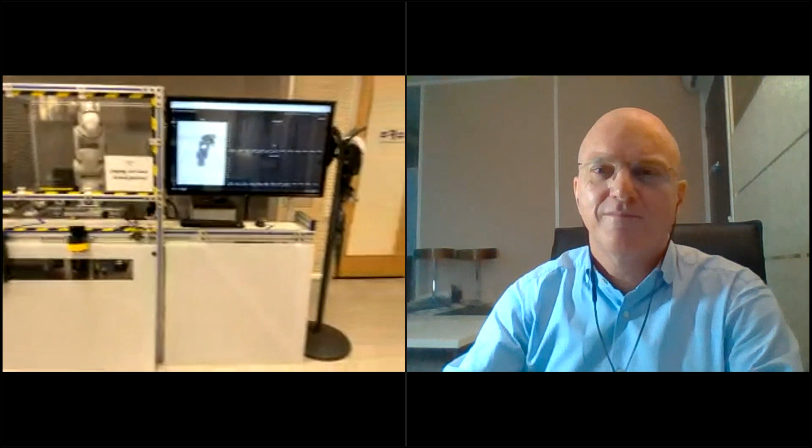I am right now in our R&D facility in Los Gatos, Silicon Valley. You can see we have that small mini production line on which we iterate to develop different types of integration.

For instance, right here we are working on a French-Swiss robot integration. You can see that we are using some cardboard because we tend to crash those while we develop this, so we don't create any damage. But once we have a good level of confidence, we move these industrial robots into a cage like that.

Next to it, we have a digital twin of the robot integrated into that small window over here, with some telemetry. I will show you that Vitesse can give life to all of these things. Station 2 and 3, that's where we interface with this industrial robot.

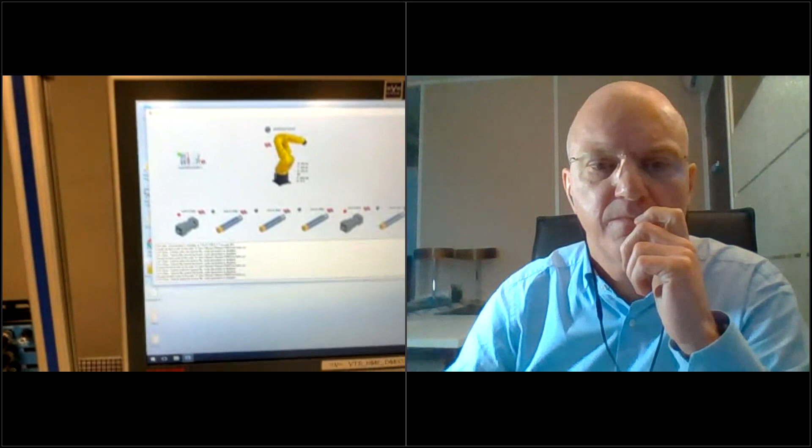We will work very quickly on building such a process as we have here. Here you can see we instantiated that robot. We are talking to an industrial controller over here, and we have a bunch of sensors and motors, as well as this robot, connected to that controller.

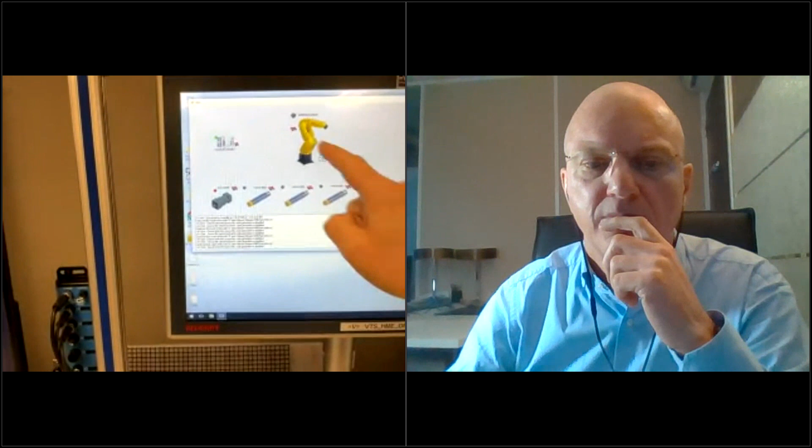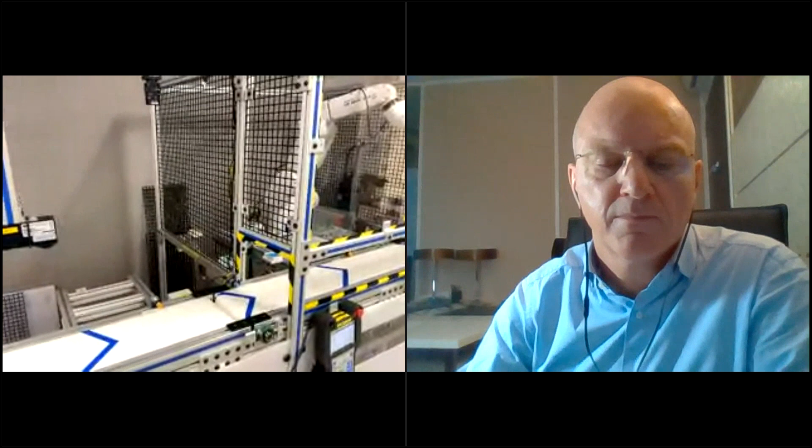With a little bit of orchestration between these components, we say when the pallet arrives over here, we want to start program number 3 on this robot, and we'll get the telemetry and handshakes to make it happen. How do we program that? I will show you very quickly.

I may be a bit clumsy because I'm holding a big iPad in one hand and manipulating Vitesse over here. In this example, I just did, five minutes ago, a quick and dirty instantiation of multiple devices that we will be manipulating.

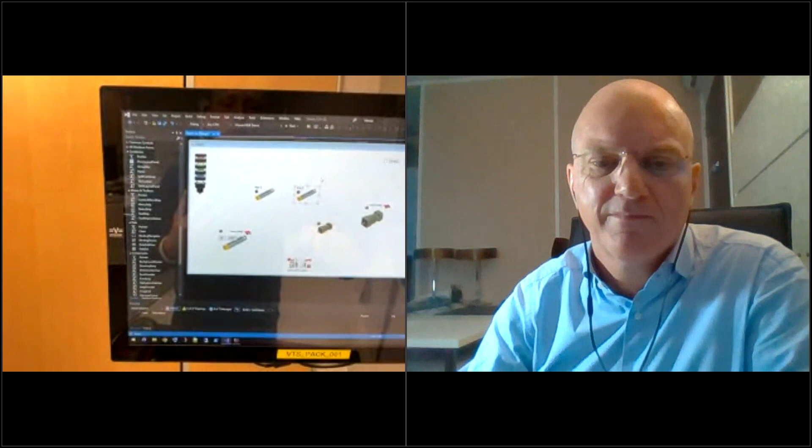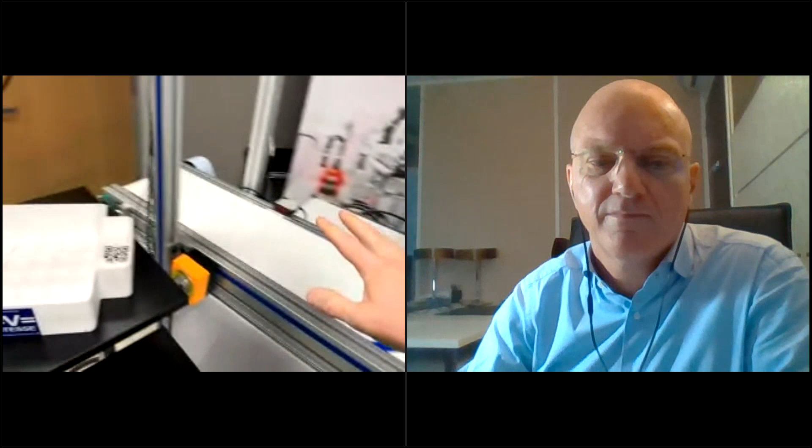We have a stack light over there. We have an e-stop. This conveyor is nothing more than a motor with a gearbox and some brakes. And we have a bunch of sensors that are on the line over here.

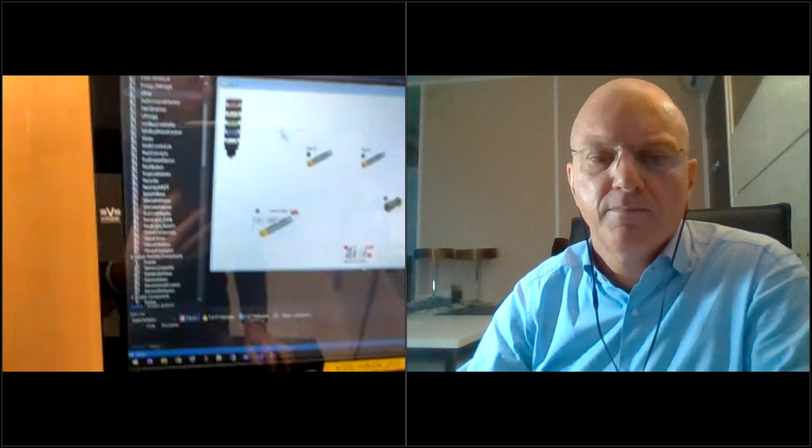The way it works is I only have to instantiate these components. For instance, we saw that we have an emergency stop over here. So what I will do is go into the Vitesse library, drag and drop an e-stop into the project. I'm going to drop it here.

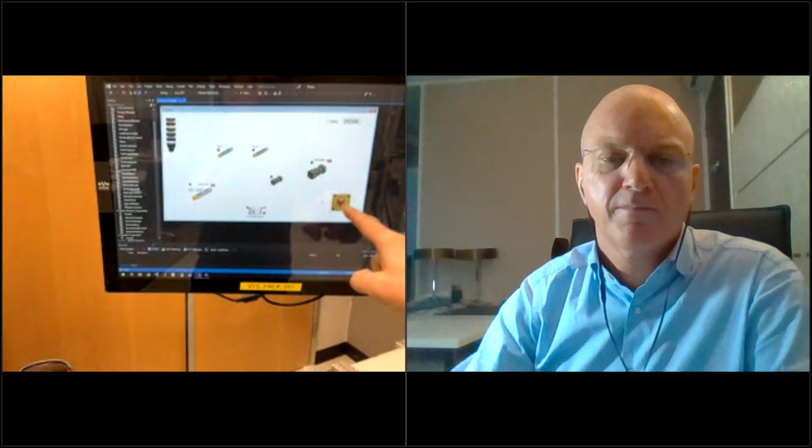There we go. Maybe you saw that it worked for a fraction of a second. That was Vitesse checking whatever is available in this project, what we have connected, and ultimately generating some code so that I don't have to. Now that I have instantiated that e-stop here, I know that safety is automatically handled at this station.

I have instantiated some motors, some sensors, and using— a little bit more to the right, yes. Sorry? A little bit more to the right, yes. Oh, okay, so can you see those?

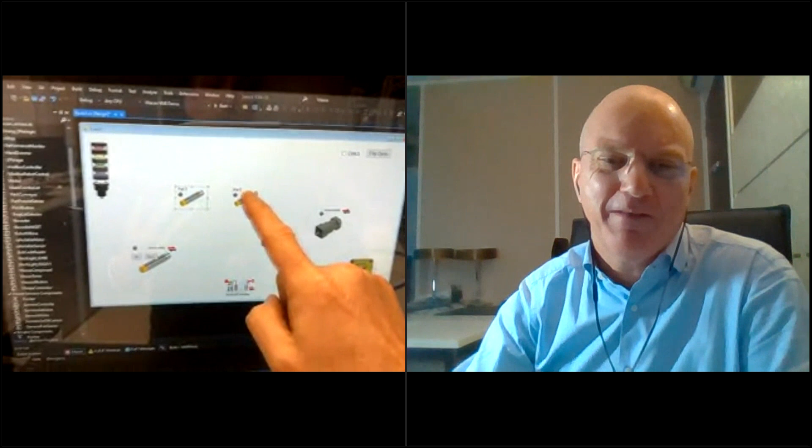Yes, we can. Right, so these are digital representations of these primitives that I'm using here. And I don't need to know on which protocol, standard, or brand they are using.

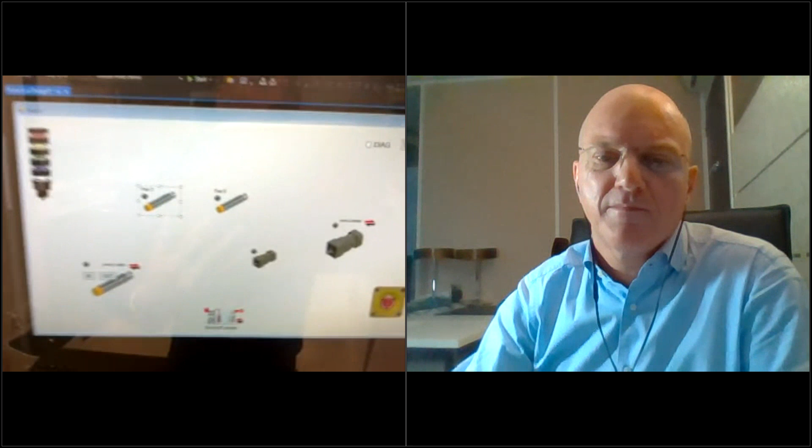I can just manipulate them in the UI and say, for instance, when the sensor over here detects a part, when the signal is raised in my interface over there, it will start motor number 1 over here. It's like one very easy way to program.

There is a better one. So now if I hit start over there, it will compile, deploy, and I should see this line here take life, basically. So it will generate some code.

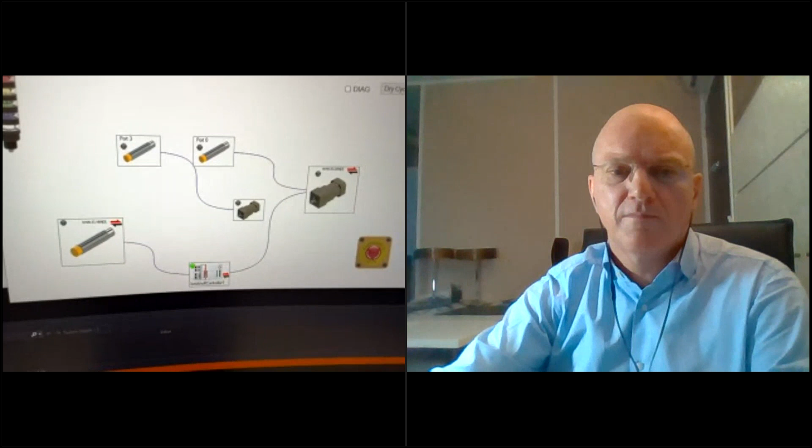There we go, we can see that the program is running. We can see the correlation, the relationship between these components. What we said here is that if this detects a part, that should start this motor. If we detect a part here, we should start that motor, which is over there. So you can see that we are switching from one protocol to another completely transparently.

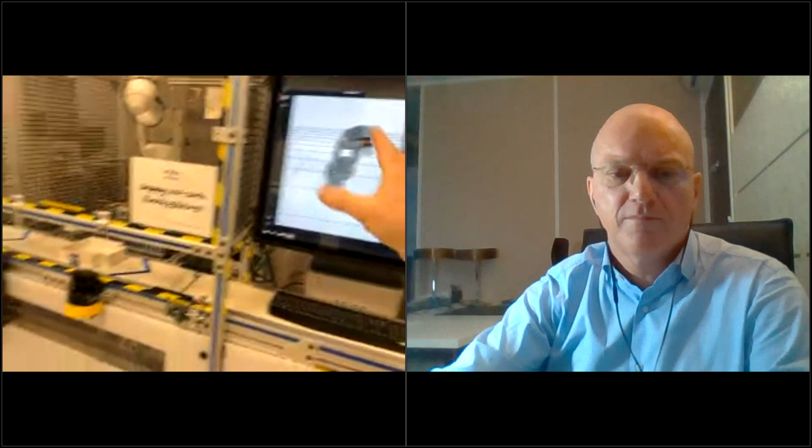So if I drop my pallet over here, we can see that it goes through the process. Ultimately, that secondary program over here is going to tell us to start this robot. And we have the digital twin that's actually on the cloud over here, showing us how the robot is running.

One issue here is I never stop this conveyor, so it's really annoying. The only way I have to stop it is to hit my emergency stop button over here. So if I do that, indeed, the HMI tells me that it has been triggered. It puts the brake on over here. That's good.

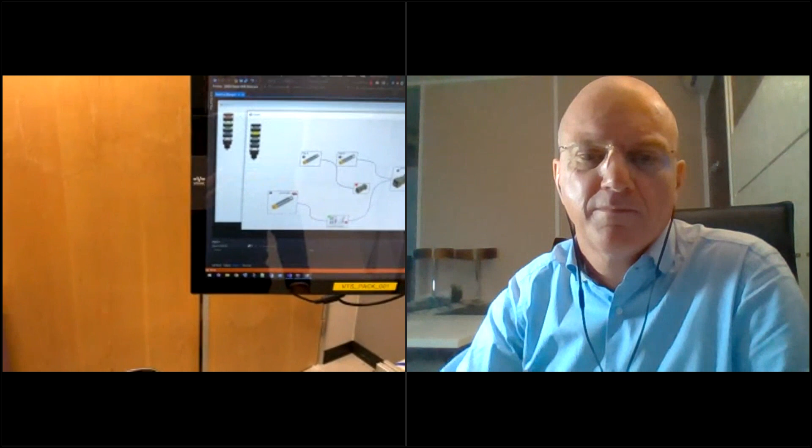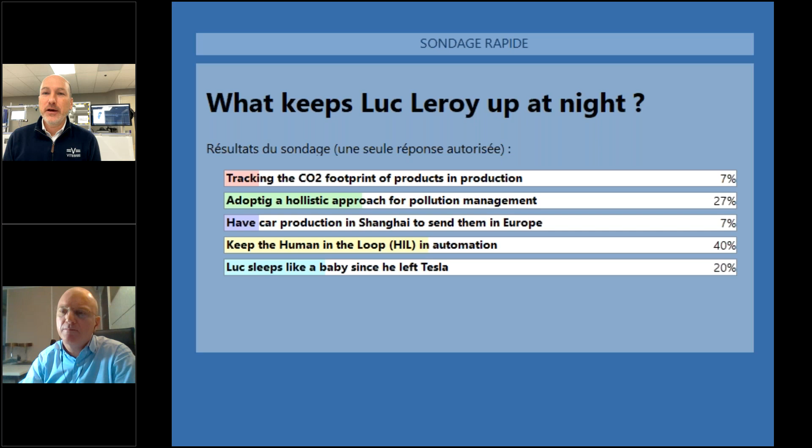So maybe you can elaborate a little on these different topics, the importance to keep the human in the loop. What do you think? I'm really pleased that this is the first topic of discussion, it reflects my thoughts pretty well. I've never really slept like a baby, but this is relatively accurate.

Human in the loop is very important, and maybe if the audience checked our website and what I've posted previously on LinkedIn, I'm always trying to educate our stakeholders and customers that automation doesn't mean replacing humans with robots. It's about making our life better as humans. And as humans we have eyes, fingers, brains that are extremely powerful, and there are tasks that humans will always have more value added than robots.

However, repetitive, extremely predictable and boring tasks should definitely be fulfilled by robots, and it takes data to understand where these investments need to be done, basically. And also, we need to not forget that companies are here to serve humans, and not the opposite.

Right. So we want to talk today about sustainability in manufacturing, and we're going to start discussing good practices. So again, I want to ask the audience what they think the good practices are.

The first option is that anyway, when you're in production, you need speed. Speed is super important. You're called full speed automation, your product is called Vitesse, which means speed, so you're kind of obsessed with speed. Other options: you have to choose the right robots, you need to have a data strategy, you need to use AI and trust machine intelligence, and the last point is maybe decentralized production could be a good option.

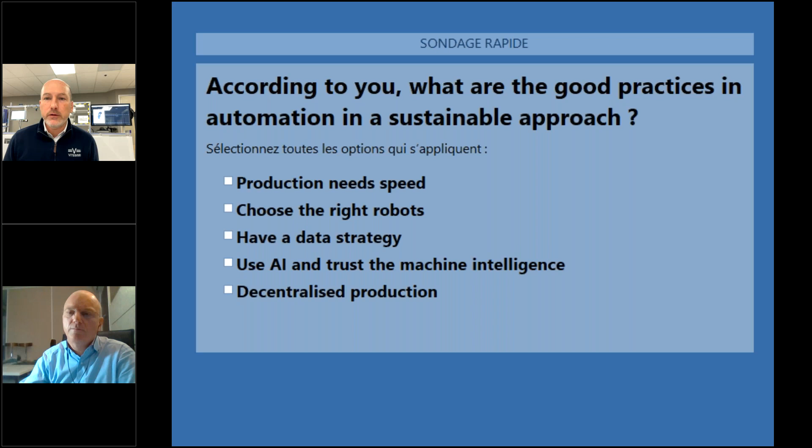Yeah, of course. We'll be doomed otherwise, right? So definitely that's possible. We need to define sustainability versus durable, ecological - these are some challenges, and unfortunately it's never totally black or white. You're mentioning data here, and I think everything starts with data. We need to understand where we are, where we stand, and what we need to do, and this requires good data sets in order to make decisions.

Right, right. So according to you, what are the good practices? If you're in a manufacturing environment, say at Tesla or wherever, one of your customers, what should be the good practice to adopt for sustainable manufacturing?

So the trend that we are observing is that efficient throughput should look slow. Actually it's very interesting - every time we visit factories that are extremely efficient, everything looks boring and slow, and I think that's a key to success.

The other aspect is the ability to adapt and iterate rapidly, which is also very interesting. We've had these conversations with you, Regis, and some of your colleagues in the past, where some small and medium industries that have not adopted Industry 4.0 practices - I believe they have an unfair advantage today, where decentralized software practices can be more accessible and more affordable than they were 10 years ago. So without having to do the heavy investments made a decade ago, which unfortunately can sometimes be seen as a golden jail, there is an opportunity, thanks to the technological progress we've witnessed over the past 5 years, to make the right decisions and get the best ROI in terms of environmental, societal, and economical impact.

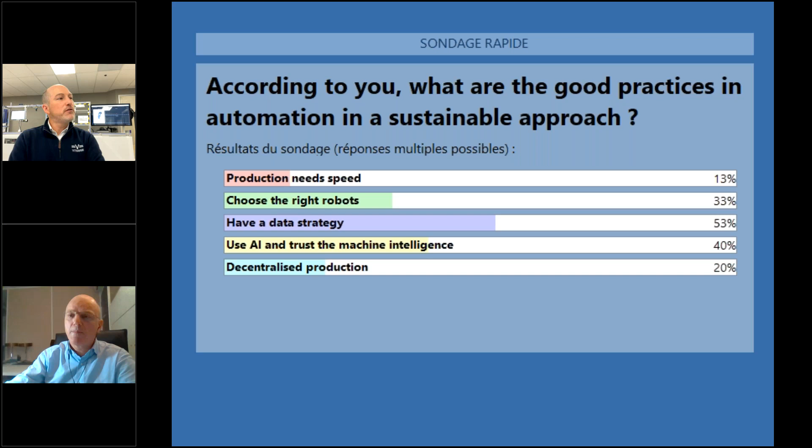So what do you think about trusting the machine intelligence? That's very interesting. I mean, I'm glad that it comes second after getting the data, basically.

I have a dilemma with that. We've talked about keeping human in the loop. Sometimes there is common sense where human can outsmart AI, or not necessarily AI, but speaking of these robot controllers that are capable of regenerating the energy, it's great when it's here. My experience is that if you combine the experience of a seasoned robot engineer with a smart robot controller, that's how you get the best return on investment, really.

So even I would challenge that a little bit, and my recommendation to every business owner, like any facility, any production facility, will be to try to be smart yourself as much as you can, and add a layer of machine intelligence on top of that. But do not completely trust it. Human in the loop always has value. It's been my experience. Okay, that's a great message.

So I suggest we switch to the next step in this discussion. As you know, when we promote these webinars, we like to collect some questions in advance. And I'm pleased that I received this question from Martin Wimmer from Siemens. And the question is how to measure and calculate, and also share and provide the CO2 footprint in a verifiable way during production steps.

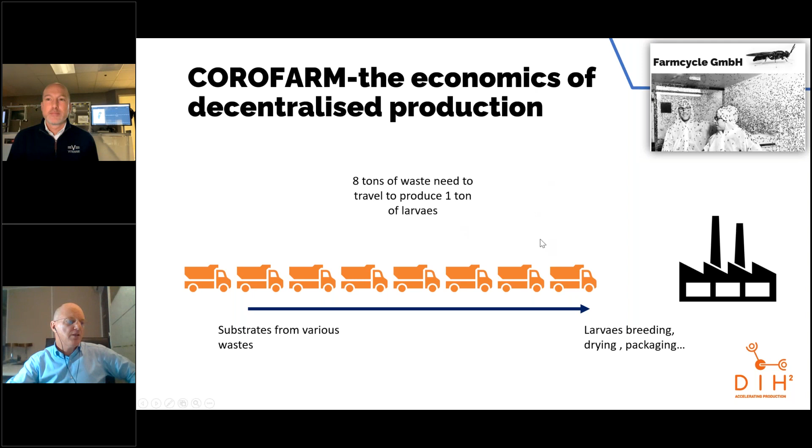In fact, you need a substrate to breed the larvae, and you need about 8 tons of substrate — waste from farms, from wineries, from breweries — to produce 1 ton of larvae. If you had a concept with a small factory localized to do just the breeding, you'd move 8 times fewer trucks, and the CO2 footprint would be dramatically reduced.

So what I learned from that is decentralized production doesn't mean you have to decentralize everything, but maybe decentralize some small parts. In this project, I'm looking forward to seeing the real thing in production, because they took a shipping container and implemented all the robotics in it just to automatically move the larvae during the breeding. So that's one example I wanted to share.

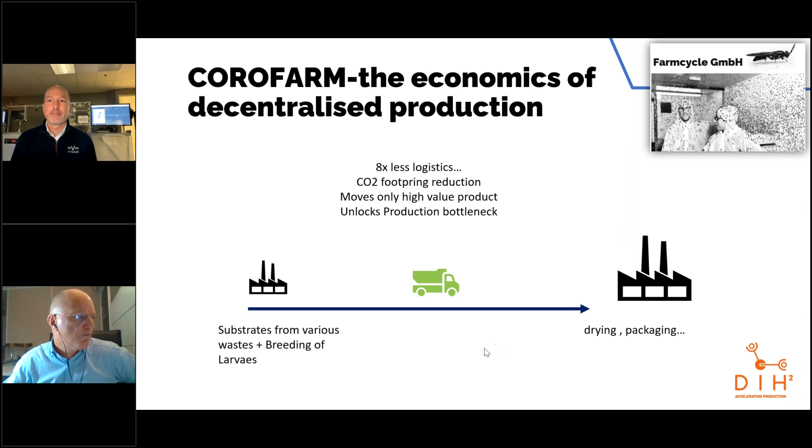I've got one question from the audience that we're going to take right now. What 3 main metrics would you say a small business or startup should use to justify the need to use robotics as part of the development or production team for bringing the startup's products to market? So where do you put the trigger — what metric could you use to say, okay, this company can benefit from robotics?

Interesting. So I think ergonomics is the very first thing that I will look into. And when we think of ergonomics, of course, it's for the health and the quality of life of our collaborators on the floor. It also has an impact on the quality of what we build, since moving things around with humans can bump or scratch the goods that we produce.

So we talk about robots. There are also cobots that can collaborate with humans, or simply by motorizing conveyors, you can unload the burden of humans having to move pretty heavy things around. So I think the first thing is to drive a study that goes through ergonomics in a very non-emotional way, putting aside the unions basically, who will tell you, yeah, we need to have great ergonomics, and that makes sense, but just be very pragmatic about the actual cost of poor ergonomics and how they can be resolved by robotics. That's the first thing we looked at.